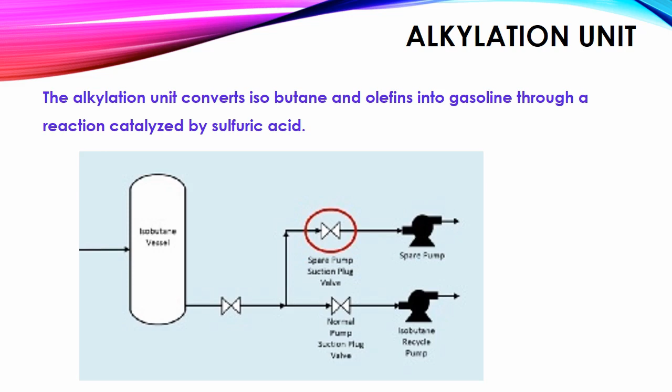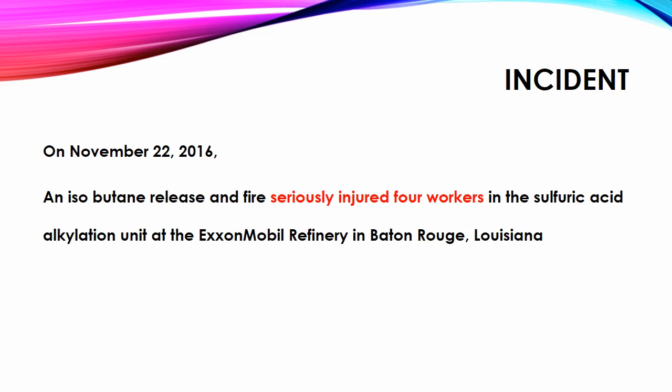The accident happened in an alkylation unit. The alkylation unit converts isobutane and olefins into gasoline through a reaction catalyzed by sulfuric acid. On November 22, 2016, an isobutane release and fire seriously injured 4 workers in the sulfuric acid alkylation unit at ExxonMobil refinery.

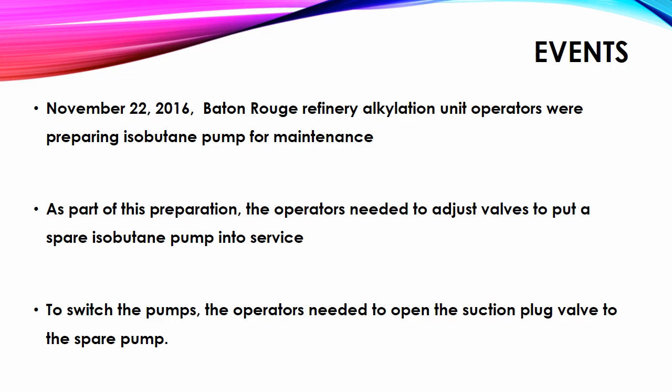That day, refinery alkylation unit operators were preparing an isobutane pump for maintenance. As part of this preparation, the operators needed to adjust valves to put a spare isobutane pump into service. To switch the pumps, the operators needed to open the suction plug valve to the spare. The refinery used a type of valve known as a quarter-turn plug valve for many applications in the alkylation unit.

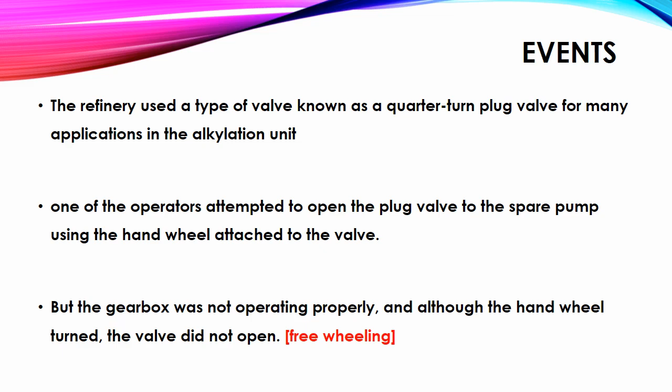One of the operators attempted to open the plug valve to the spare pump using the hand wheel attached to the valve, but the gearbox was not operating properly, and although the hand wheel turned, the valve didn't open. That means freewheeling. One of the operators removed the gearbox assembly so he could turn the valve stem with a pipe wrench to open the valve. Removing a malfunctioning gearbox from a plug valve is an accepted practice for alkylation unit operators.

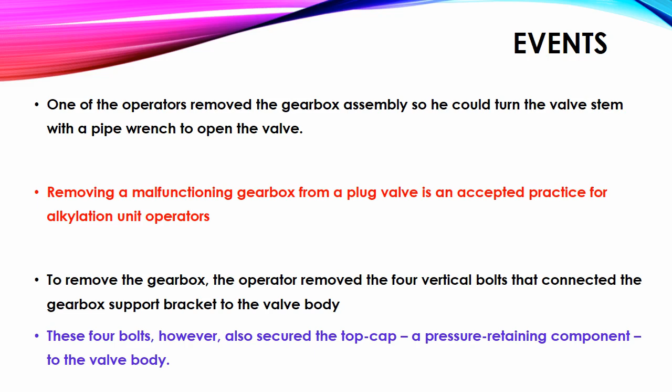To remove the gearbox, the operator removed the 4 vertical bolts that connected the gearbox support bracket to the valve body. These bolts, however, also secured the top cap, a pressure retaining component, to the valve body. One of the operators then opened the valve by rotating the valve stem with a pipe wrench, while the other operator observed. When the operator turned the valve stem, the plug valve loosened and came apart. The pressurized isobutane escaped from the valve body, forming a flammable white vapor cloud.

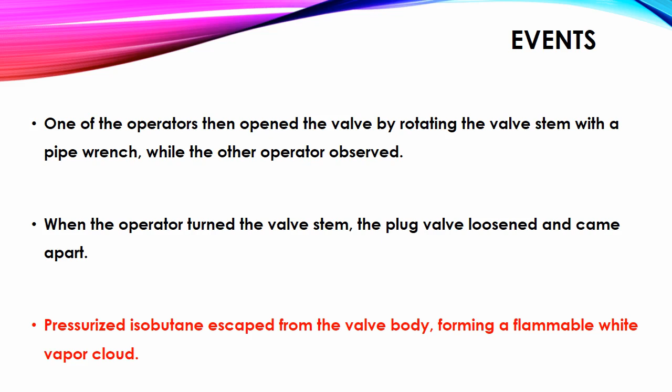Following the release, the operator shouted to others in the area, including workers on the scaffolding above, warning them of immediate danger and ordering them to evacuate. One of the operators alerted the board operator of the emergency by radio and told him to shut down the unit. ExxonMobil estimated that 2,000 pounds of isobutane were released to the atmosphere based on the surveillance video, and an energized welding machine located roughly 70 feet away likely ignited the vapor cloud.

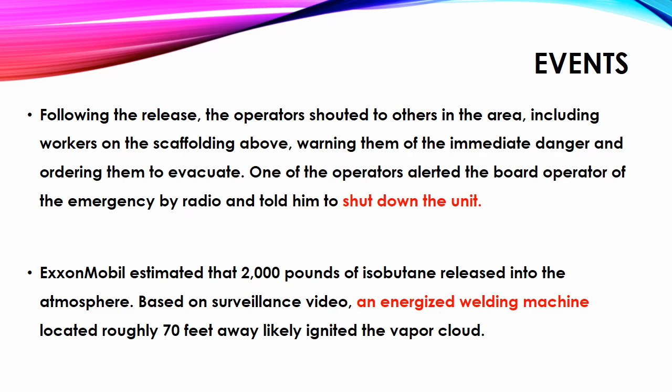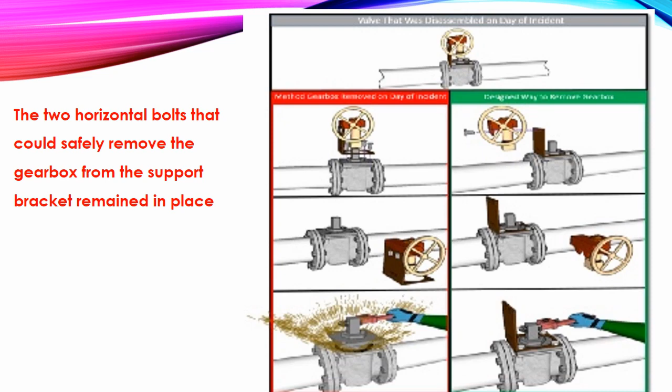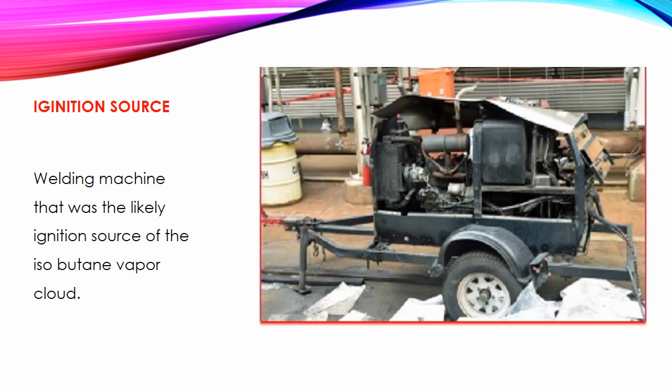Why did this incident happen? Safety management system deficiencies. Failure to identify and address the older model plug valve design and gearbox reliability issue. There was no written procedure, and no proper training for workers.

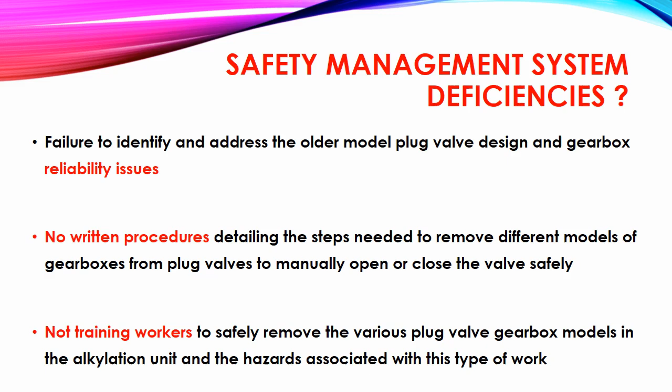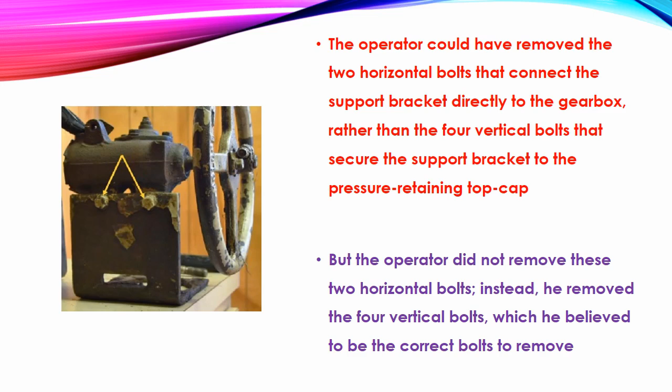See this picture. The operator could have removed the 2 horizontal bolts that connected the support bracket directly to the gearbox, rather than the 4 vertical bolts that secured the support bracket to the pressure retaining top cap. But the operator did not remove these 2 horizontal bolts. Instead, he removed the 4 vertical bolts, which he believed to be the correct bolts to remove. It's actually caused by the lack of training and procedure.

How to improve the mechanical integrity? The improved plug valve design includes an additional 4 gearbox support bracket holes separate from the pressure retaining top cap. See this picture.

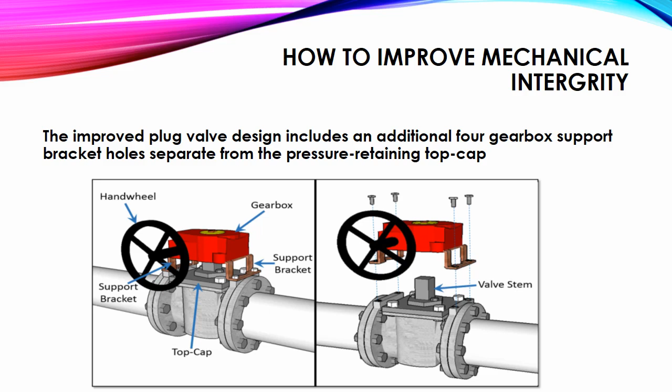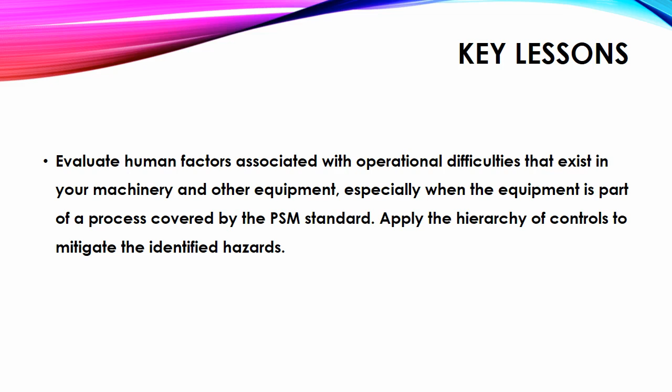These are some of the key lessons from this case study. Evaluate human factors associated with the operational difficulties that exist in your machinery and other equipment, especially when the equipment is part of a process covered by the PSM standard. Apply the hierarchy of controls to mitigate the identified hazards. Establish detailed and accurate procedures for workers performing potentially hazardous work, including job tasks such as removing an inoperable gearbox.

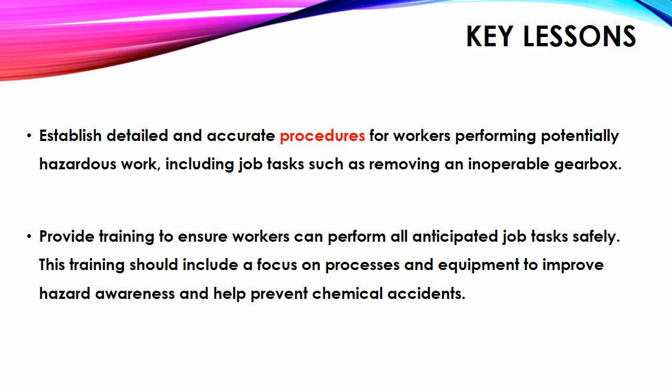Provide training to ensure workers can perform all anticipated job tasks safely. This training should include a focus on process and equipment to improve hazard awareness and help prevent chemical accidents. We have to consider the lack of which process safety management elements led to this incident. Clearly we can say mechanical integrity, procedures, and proper training.